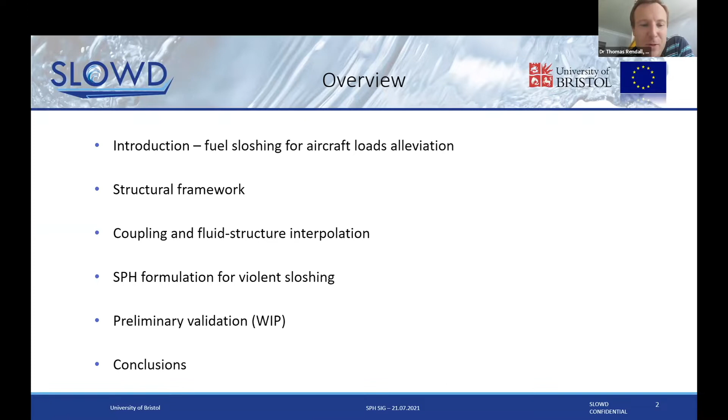Some summary of some of the results, quite a few which are pending. So Joe's working busily away, trying to get those test cases done. I'll show you the ones we've got at the moment and finish up.

So brief summary to do with aeroplanes really. Most aircraft have what's known as wet wings. So the structure of the wing, it's open inside, and it's where the majority of the aircraft's fuel is stored. So you can see this is sort of the wing spar, so wing box. So there's a front spar and a rear spar, ribs around it. You're not looking at the aerodynamic wetted surface here. We're looking at the internal part, and inside that there will be many tens of tons of fuel.

Sometimes also stored in the center box that joins the wings together, sometimes also stored in much smaller tanks elsewhere on the aircraft as well. An aeroplane's fuel fraction depends, as you might expect, quite strongly on how far it's going to fly. So if you're looking at a big aeroplane, probably at takeoff, 30 to 40% of the aircraft's weight is fuel for a long flight, obviously less for shorter flights.

But there's a lot of fuel on an aeroplane. It's probably the largest part, excluding the remainders of cargo and engines and airframe weight. It's an enormous component on long flights. So it plays a big role in the dynamics. Obviously, the inertia is a big deal. It's a lot of it there. But we're interested in this project in looking at the dynamics of the behavior of that fuel, and specifically what sort of damping characteristics it produces on the system overall.

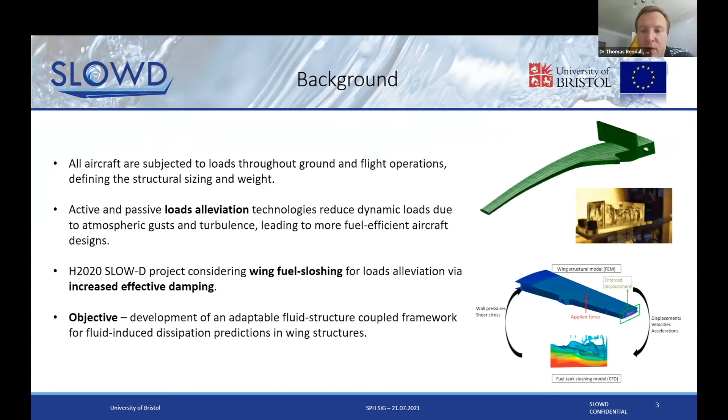So the objective of what we've been looking at as this part of the project, Sloshing Wing Dynamics load, is to perform coupled fluid structure modeling of the wing and the contained fuel. So it's obviously a problem which can be handled in a couple of ways. SPH is obviously a good one with its free surface capabilities. It can also be done, of course, with VOF, and that's also being done within the project as well. But we've been looking at the coupling part and applying a basic SPH tool to model that.

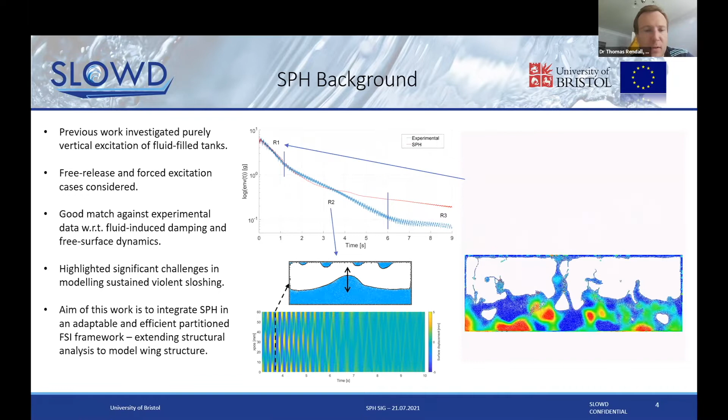So how is it going to be done? We're using SPH for the fluid side. Other partners in the consortium will be using VOF. The structural modeling, this is an interesting point. Aerospace tends to use NASTRAN, which stands for NASA Structural Analysis, as its default FE tool. It's a ubiquitous thing. It's got a few different software implementations out there, but that's the fundamental analysis tool that tends to get used, especially at a company like Airbus.

So the coupling we're going to do here is going to use a modal model. So it's a relatively straightforward structural representation. It's linear, so we decompose into the different mode frequencies. You can see some sketches on the right-hand side. This is actually a sketch for the simulation that Joe is working on at the moment. This is going to be replicating what was done in an experiment at Filton a little while ago. So we decompose into these different mode shapes, and because it's a linear problem, the modes are uncoupled, and we have generalized modal coordinates, which we can use to map to real XYZ space using the modal shapes.

Why would we want to do this? Probably one of the most important points for this project is that a lot of people are going to want to couple using different software. So a modal analysis is something that can stand alone. NASTRAN will digest your mass and stiffness matrices and produce your modal representation. And you can read that into any subroutine or software you want to create, and use those mode shapes yourself. So it means that you don't need to be directly including NASTRAN in your time loop.

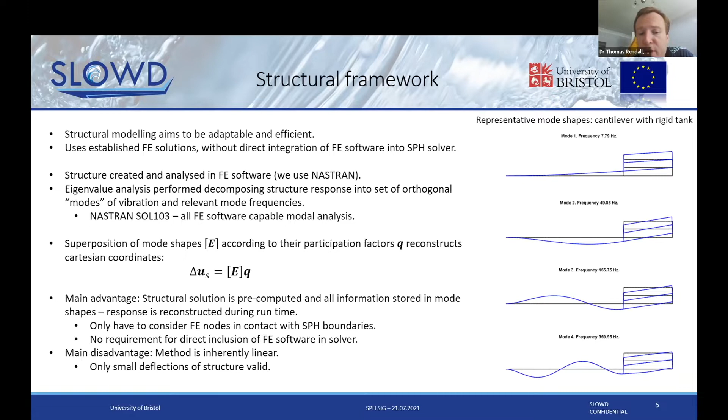This works if you're doing a relatively straightforward linear analysis as we are at this point. If you want to do a fully non-linear time marching analysis with NASTRAN, you'd have to include it within your time loop, of course. But software-wise, that's a more substantial overhead. So everything's pre-computed, and all you're doing in the time step for the structural side is advancing maybe 10 or 20 different modal amplitudes, depending on how many you've chosen to use. So it's a particularly small, straightforward calculation. Obviously, it's linear, so you're looking at reasonably small deflections, not absolutely enormous, in order for it to be completely valid.

How is it implemented? We've used an implicit Newmark integration scheme. So the mass, stiffness, damping system is rewritten in terms of modal coordinates. What that means is that when we have a force, Fs, which is applied on the real structural system, it's converted through the transpose of the mode shapes to generalized modal forces, and then that's applied to the differential equation in the usual way. Once you move to the modal system, the mode shapes, because of the decomposition, are all uncoupled from one another. So you're advancing effectively 10 or 20 simple harmonic oscillators.

The implicit Newmark scheme is quite handy. It's unconditionally stable for a linear problem, and it preserves energy exactly for linear problems, which is quite nice. So you're not going to introduce any erroneous damping, only the damping that you genuinely believe is present within that system. It's a good reason to use it. That does lead to some of the behavior that you'll see later on, where if you haven't introduced any damping, things will tend to vibrate indefinitely. But it's good not to have any unwanted dissipation on the structural side.

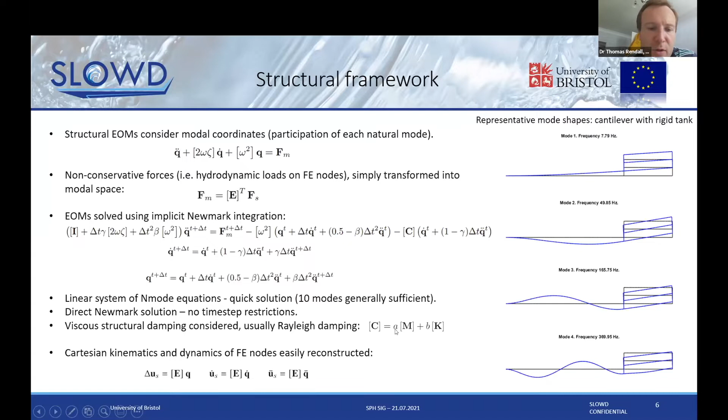You can include different types of damping, of course, depending on how you feel about the damping in your structure or what it looks like. That can be included as well.

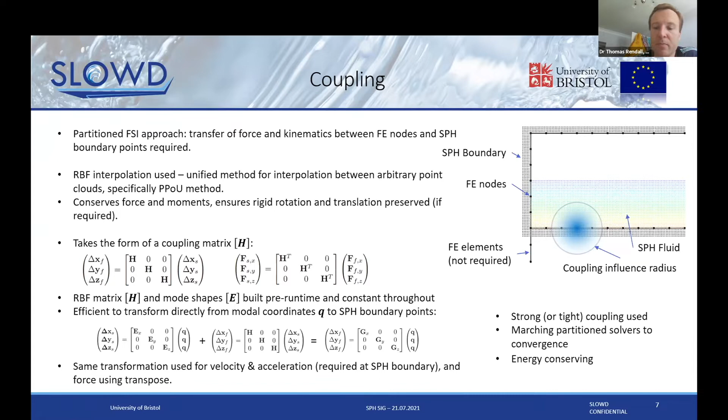So there are other ways of doing this coupling between the two boundaries, but this is a particularly flexible one. It's meshless. It has the energy conservation. If you want to, you can also make sure that properties like total force and total moment are also conserved across the boundary too. So that's how we exchange the data.

Now, very briefly, the SPH part of this.

So I can be quite honest, and I'm going to say, I think when I first saw the slide that Joe sent, this indicates to me how quickly a supervisor loses track of a project if the students are working really hard and making lots of progress.

So in summary, the SPH that's been applied is delta plus. Now, the purpose of doing that is to try and get reasonably good particle distributions, and also to not have any excessive levels of numerical viscosity in the problem. So we're trying to predict the actual damping that we've got. So we don't want anything that's non-physical creeping in to interfere with that. So that's motivated choosing this particular implementation of SPH here.

So it's got the particle shifting to achieve the improved positions, and also it's got this diffusive term on the density gradient.

So a modification of the delta SPH, which has been used a fair bit. The integration, we actually use the same integrator, so it's a Newmark scheme again for the SPH integration. So it's implicit, so it's solved at n+1, the correct time level, so it's fully synchronized at that n+1 time level. So there's not really any scope for any spurious time shift between the two models that we're using. They should be solved at exactly the same time level.

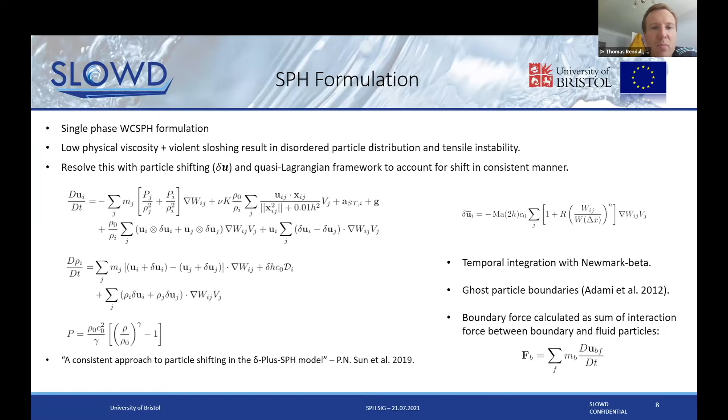The Newmark scheme is solved with just a straightforward functional iteration at that time step to solve it. And again, some effort that Joe's made with the boundary particles to try and reduce any spurious dissipative effects that might change the overall prediction of damping. So where's he got to?

So the case that Joe's run corresponds to this water column, and it's sitting on top of this beam. The beam's actually modeled in the depth direction by a few elements in Nastran, and you can see you've got the fluid particles sitting on top, and then underneath we've got what represents the boundary, so the fluid boundary particles. And then the challenge for the coupling is, of course, to take forces from the SPH on these overlapping grey dots and pass them onto the FE grid, which sits underneath. And then to take the displacements of the underlying FE and pass them back onto the SPH points so that the fluid will respond.

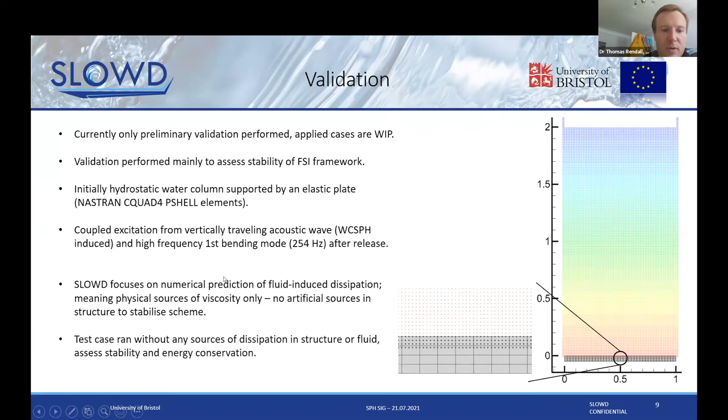So look at what this case does. So probably before watching it, it's worth pointing out that, as I mentioned, the structural integrator has got good energy conservation properties in time. So it doesn't dissipate any energy for a linear system in time, but that does mean that it, of course, vibrates for quite a long time, as you might expect. So it's a very small displacement because the beam you've got at the bottom is relatively stiff.

The black dotted line here, that indicates the analytical expected deflection. It's pretty small. You can see the computed deflection is a little bit beyond that, and obviously it keeps oscillating. There's no structural dissipation there, so whatever damping is present is purely numerical on the fluid side, and fairly limited. So the sort of quasi-acoustic waves tend to rattle around for some time.